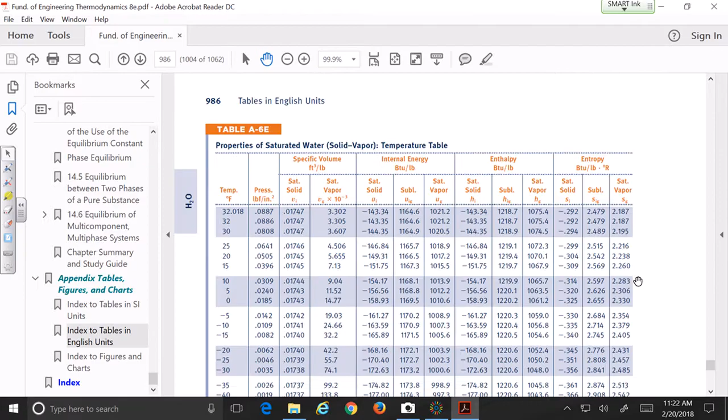And the same one for English units or SI units, okay? So in both units, so we say A18, 14. Okay, so this is A19E.

I don't think you need this one. You might need this one, so A20. That doesn't mean for this exam, okay? I'm just thinking about the rest of the semester. So A20.

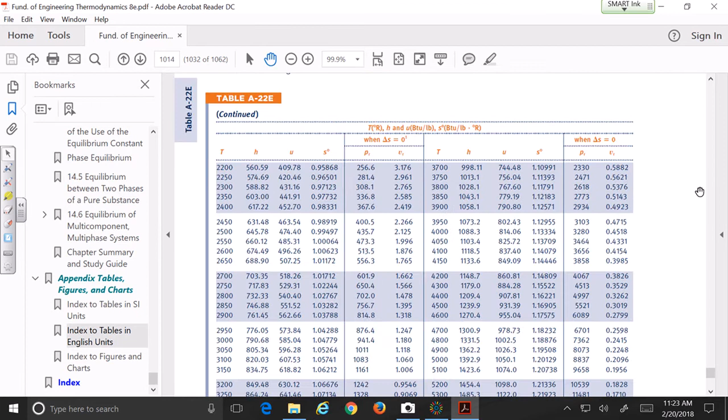This one, you're not gonna need it. A22. That one you might need it. What is this?

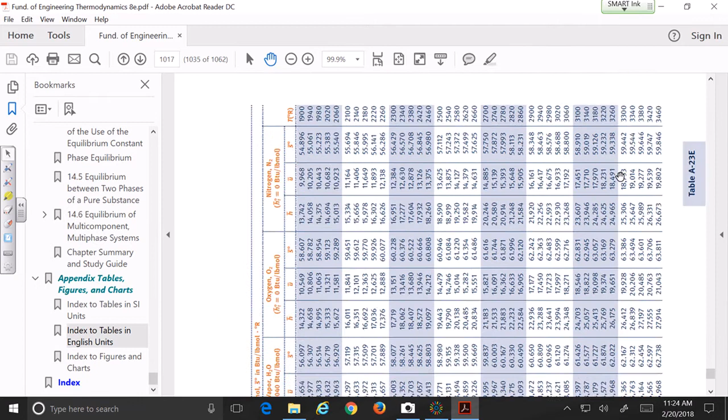I don't think you're gonna need this one, but it's just one extra. A23. You don't need this one. And you don't really need this one either, but again, you might need it for a problem.

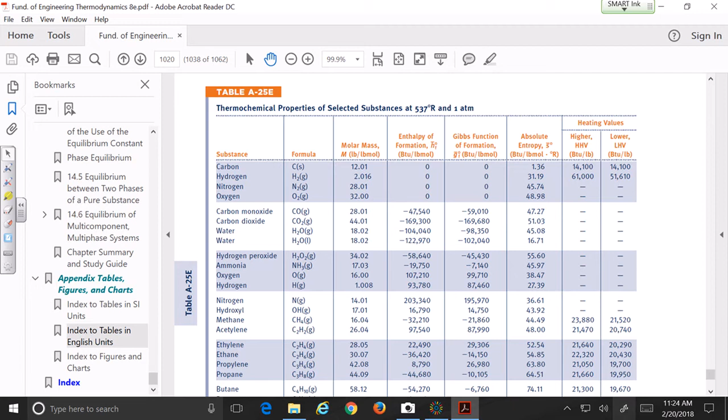You don't need this one for sure. Yeah, you don't need any one of those figures. You don't need them, okay? None of that stuff we're going to be using.

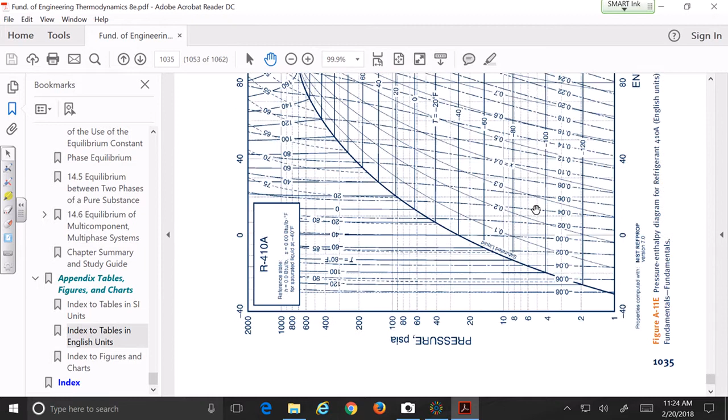Okay, so let's see. I will say both in SI and English units, I will say these tables. So from A1 to A18 plus A20, A22, A23 plus A25 for SI and English units. Okay, if you don't want to come with a very thick stack, if you print both sides of the pages, okay, you end up with not that many pages.

But it's up to you, okay? If you want to have all in one face so you don't have to go to the back, you are more than welcome.

Can we use the copies of pure substances sheets that are on Canvas too? You can use, you can also bring the page for the pure substances that shows you the two shape of the figures as well as the equation to find when it's a mixture. And I think you can use as well, but that one I will bring it all the time, the one for the units.

Okay? Yes? And just clarifying, apparently in my notes there's a few equations that we can add to that sheet, right? To that equation, probably you can add if you want at the back, because I think you will know them, but what is the general form of the equation for, let's say, conduction, convection, radiation, and I think you should also add what is the value of the constant for radiation, the Stefan-Boltzmann constant, okay? That one you can add it as well.

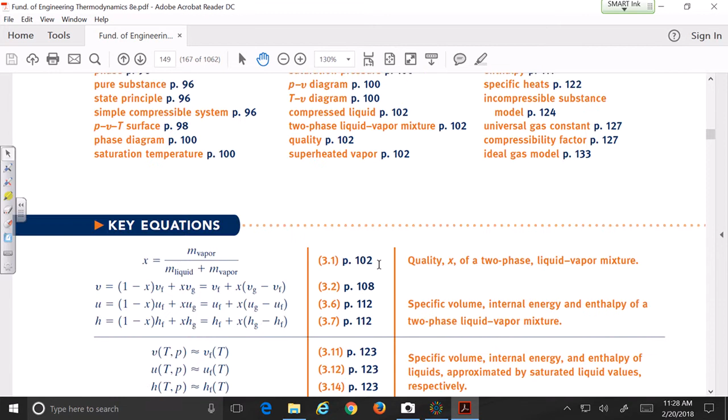So let's see what 333 is. Let's see what other equations are over here. Yeah, I don't see that. 333. Let's.

Should I give you 333? Looks like a long number. This one here? I don't think it's the right section. I'm on the wrong section. 3.33. Probably. Where am I here?

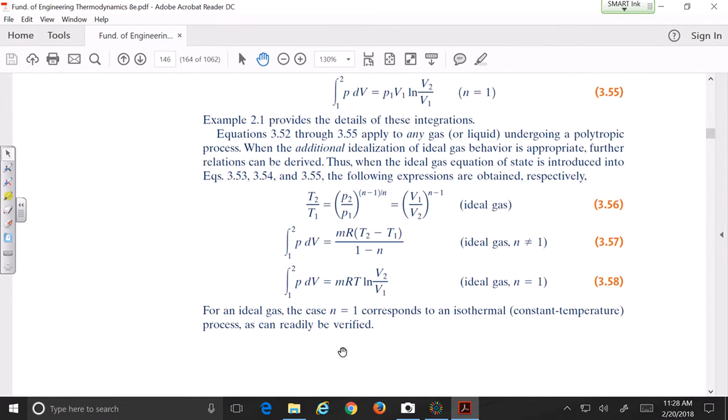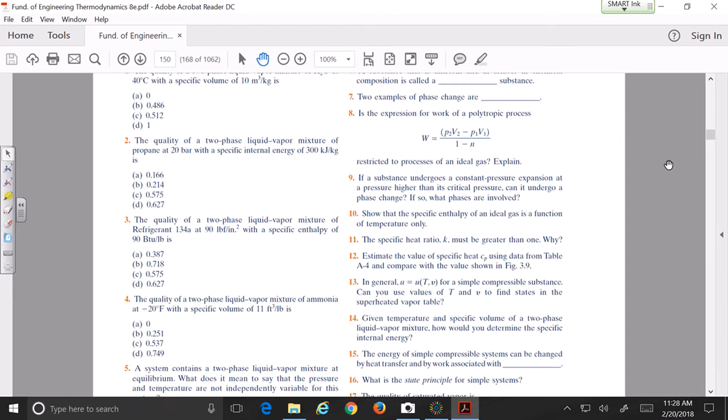What is chapter? Is this one? This is chapter 3. Keep going down, like further down. I mean, let me move this one so it's not that high. But I thought this is chapter 3 and 3.3 is this one, no? Right there, right there, right there. Down, down. Oh, okay. Those were questions.

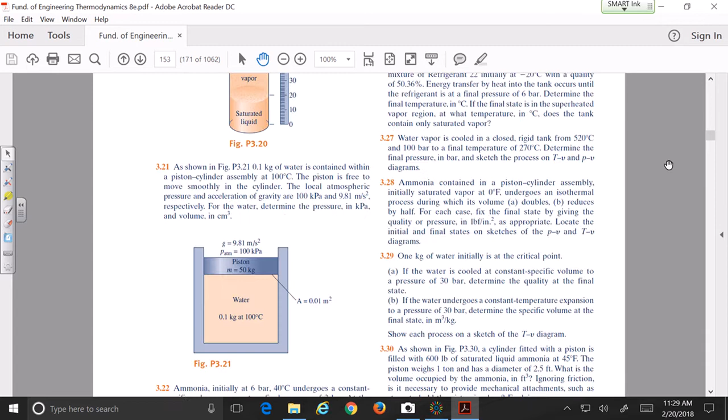I get it. So as you can see, it's not that I've seen the problems before, no? I have no idea what they are. Okay, so here we are. So let's see, problem 3.33. Let's do it. Let's see if we can do this.

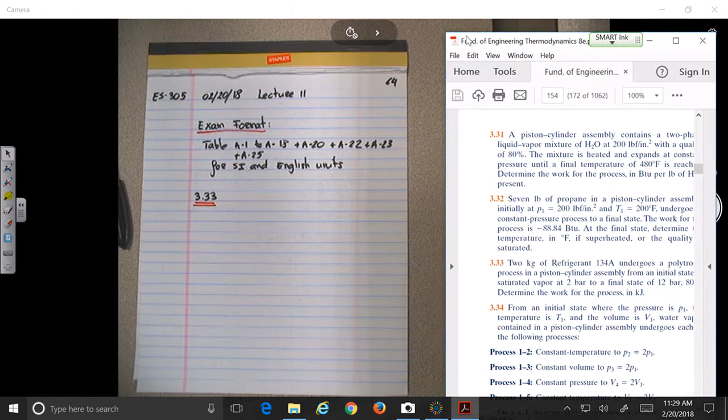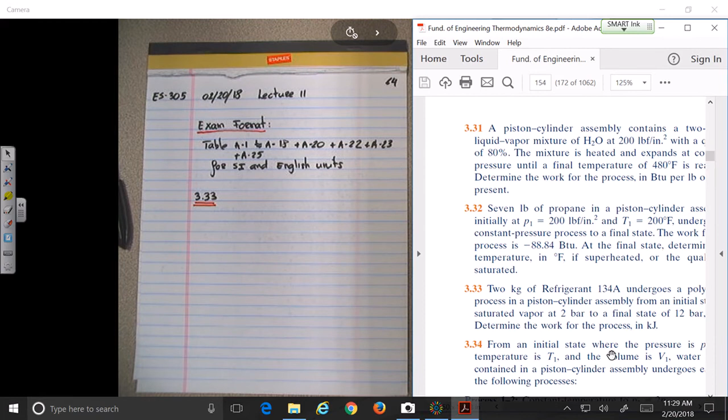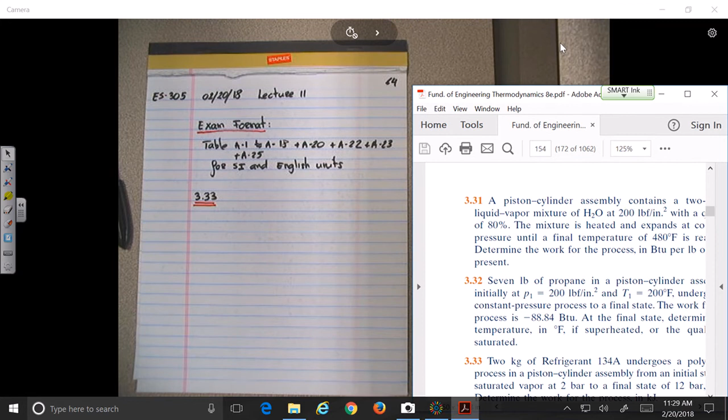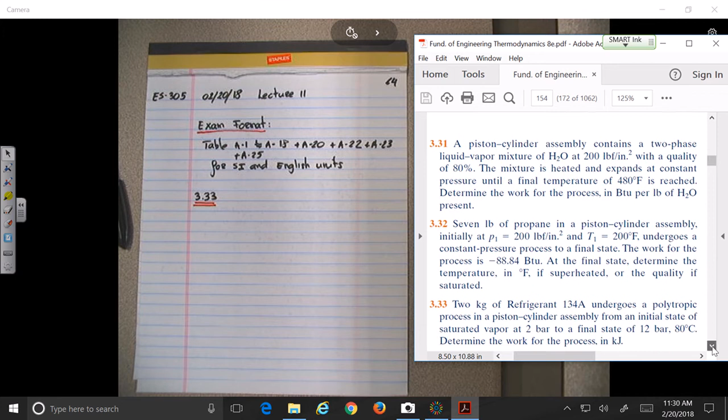Probably put on, I do the other way around. I move this to the right, and I write to the left, no? Can you read, or do I try to make it a little bit bigger? Is that a little bit better? But now I need to move it to the right. How can I do that? This is not really responding to good. Okay, so I think that's a little more clear.

So 3.33. Okay, so 2 kilograms of refrigerant 134A undergoes a polytropic process in a piston cylinder assembly. So as soon as you hear the term piston cylinder assembly, always do this type of figure. Okay, this is a bit automatic. I don't know if I need it, but I do this. So we know this is refrigerant 134A.

The mass is 2 kilograms. Undergoes a polytropic process. So what is polytropic process? Is PV, I guess PV to the gamma equal to a constant, okay?

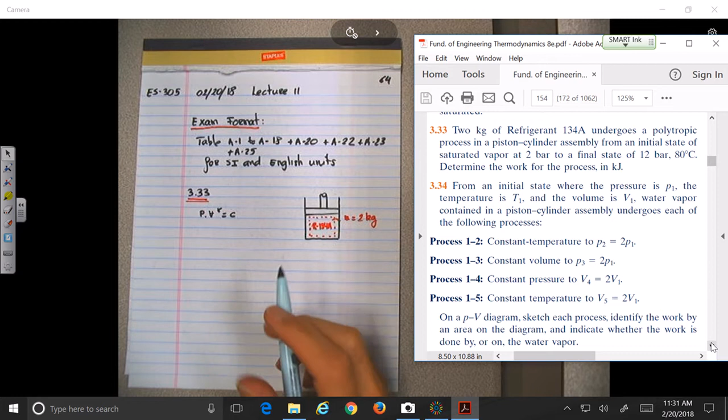Undergoes a polytropic process in a piston cylinder assembly from an initial state of saturated vapor. Okay, so we might not need this, okay, but you can do the figure or whatever you want. So let's say initially we are at saturated vapor over here. So P1 equals 2 bar. So maybe I did over here what diagram I'm doing here.

Okay, I do the T-v, so there should be lines of constant pressure. But then I go to a 1 to 2, so I don't know, maybe it's fine. All right, so we need saturated vapor. What else do we know? To a final state of 12 bars, so we know P2 equals 12 bars at T2 equal to 80 degrees Celsius.

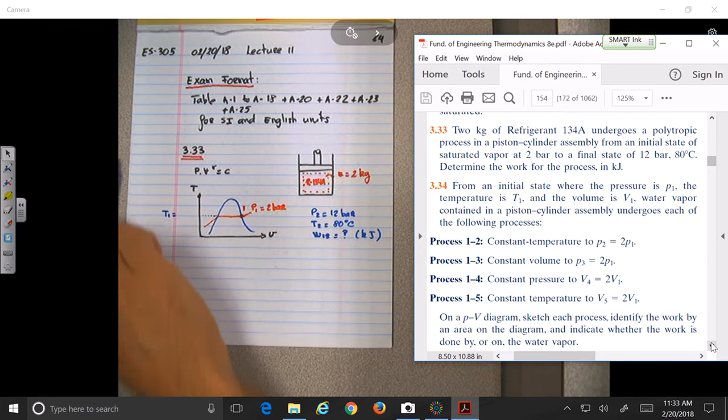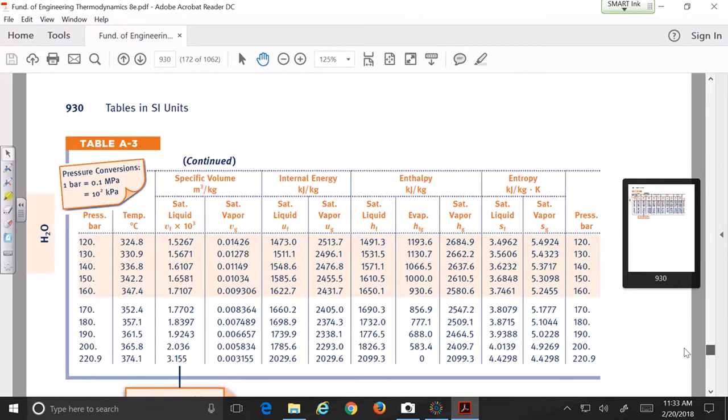I don't know if we need it or not, but just by curiosity. So I guess we could come over here. What is the table for that? A-10. Thank you. So page down.

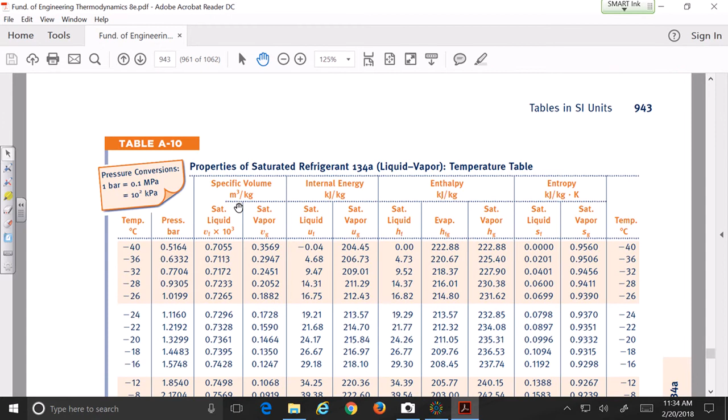A9, A10. So let's see, we know the pressure is 2 bars, so maybe table A11, do you have A11? So I will go to table A11. For 2 bars, what is the temperature? Minus 10.09.

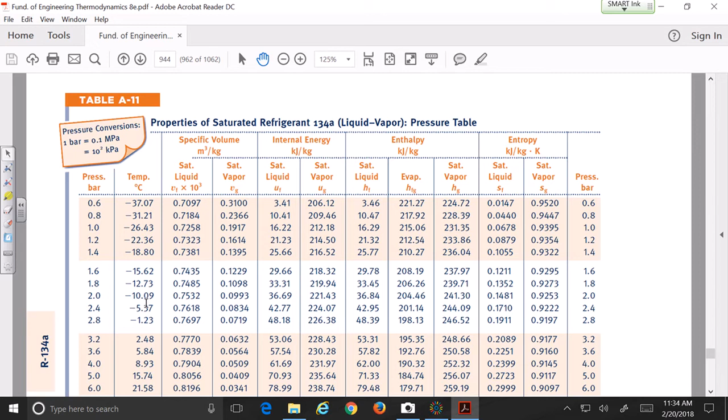So I'm just trying to see over here, and we know P2 is 12, so here P2 is 12. What is the saturation temperature for P2? 46.32. And the temperature in our problem is 80. So what's going to be the state? Superheated.

We can do that if you want. If you do it here, obviously it's not going to be to scale at all, but let's say this will be P2 equals 12 bars. We know the saturation temperature here, what is it? 46.32 - I mean don't put T2, but we know T2 is somewhere over here, where the saturation is 80. So really the process we are looking at is something like this. You should have done a figure bigger than that, okay, but again, it's...

So I'm here, and now I'm going to write this as being equal to minus 1 over 1 minus gamma. I'm changing the order, and now what I do is put the C inside. So it will be C, V2 to the power of minus gamma plus 1, minus C V1 to the power of minus gamma plus 1. Do you see what I've done between this step and this step?

Okay, nothing too complicated. So now we know that this is a polytropic process, so polytropic process means that PV to the gamma equals C. So for this one, I could say that C is equal to P2 V2 to the gamma, and for this one, equal to P1 V1 to the gamma.

So now we have the expression that Work 1,2 equals minus 1 over 1 minus gamma. And then what's going to happen to the V2 to the gamma times V2 to the minus gamma? They cancel each other - it's like having V2 divided by V2. They don't cancel each other, but it's equal to 1.

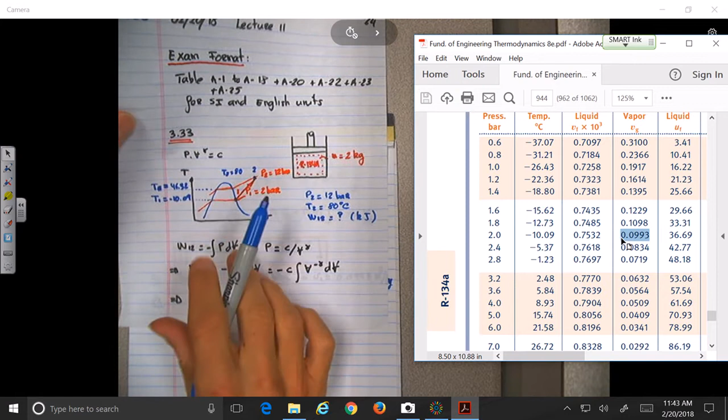Now V2. From the figure we know that V2 is going to be superheated, so I'm guessing it's one more table. Table A12, is it table A12? So we go to the superheated table. You see here they tell you to divide the value, so this is new, that's good.

So superheated refrigerant, what do we know over here? We know the pressures and the temperatures. So let's see if we find pressure of 12.

Okay, maybe it's on this one. I'm guessing 8, 10, right hand side, that's what I thought. 12 over here. We need to look at what? At the temperature, so it's going to be difficult for me to look at this all at once. So it's 80, is this line, no?

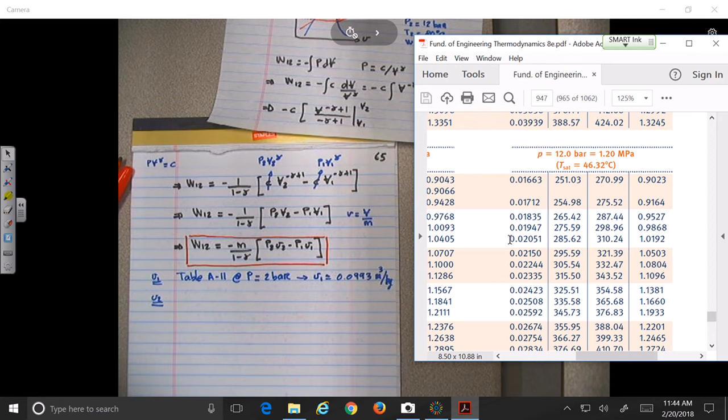Yeah, so the one right above the orange on the first one. So it looks like it's going to be this one here, no? And this one here, we're going to look, I guess, at this value here. Let's check, going up. This is the V. So what should be the V?

So we go, let's say, to table A12, at P equals 12 bars and T equal 80 degrees Celsius. We have that V2 is equal to 0.02051 cubic meters per kilogram.

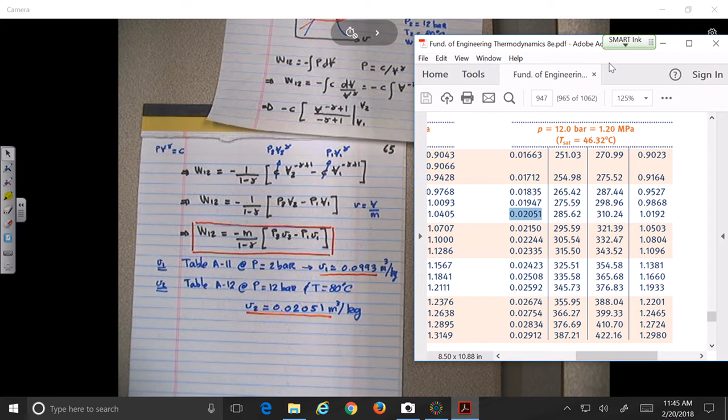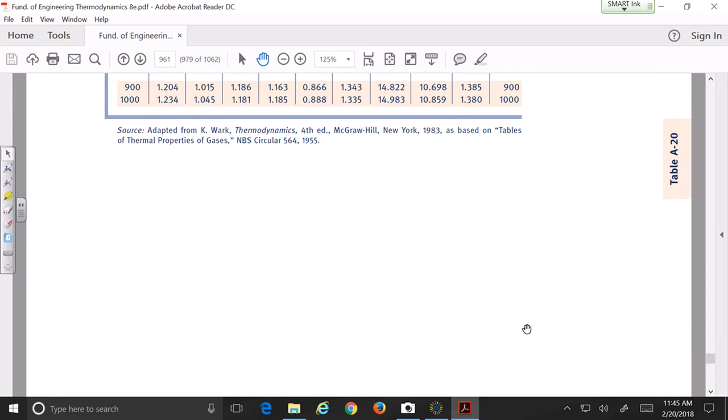Okay, so now for the gamma, let me magnify this. My first reflex will have been maybe to go to some of these tables here, but they probably don't have it. Do they have this one for the gamma? You see, they are for air, nitrogen, oxygen, but they don't have it for refrigerant, okay? So my first reaction would have been to come to this figure here and see if they had it. You see the CP, CV, K. The K is what we have, okay.

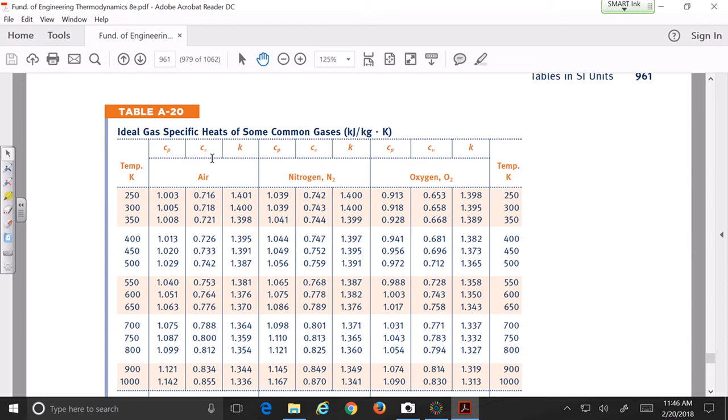So let's see. Okay, so let me look at the solution and see the way they do it, that way we don't turn around. So it's 333.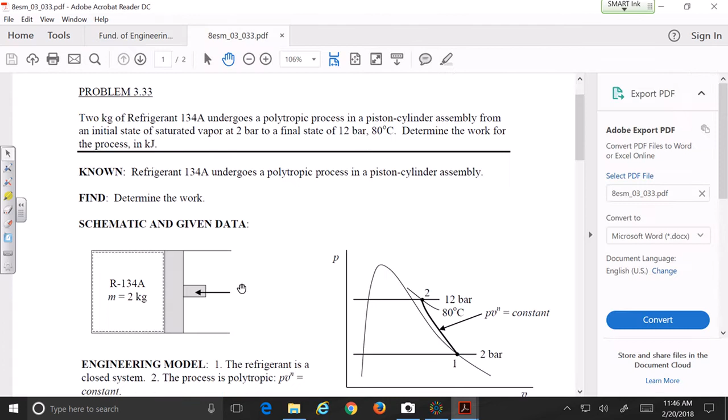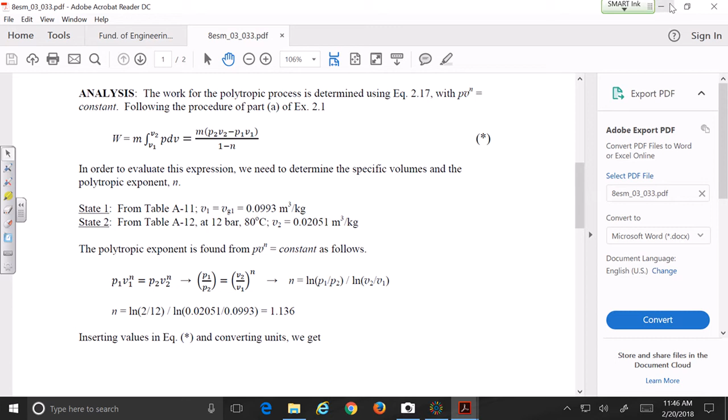Okay, so let's see. Okay no, yeah, it's very simple. I should have thought about that. It's not complicated, so basically what they do is this.

So basically, you know it's a polytropic process. So polytropic process means that, now we're trying to find gamma. Polytropic process means what? P1, V1 to the gamma will be equal to P2, V2 to the gamma. Okay? So over here,

Okay, so this will give us what? Let's say this will be equal to P1 over P2 will be equal to V2 over V1 to the gamma, no? Okay?

So now what I'm guessing what they do is that they take the log on both sides. Yeah, so this will give you what? All right, and now my guess is that they use a property that log of V2 over V1 to the gamma is actually equal to what? Gamma log, correct. So you use the property that log of A over B to the C equals C log of A over B, no? Okay, so use that property.

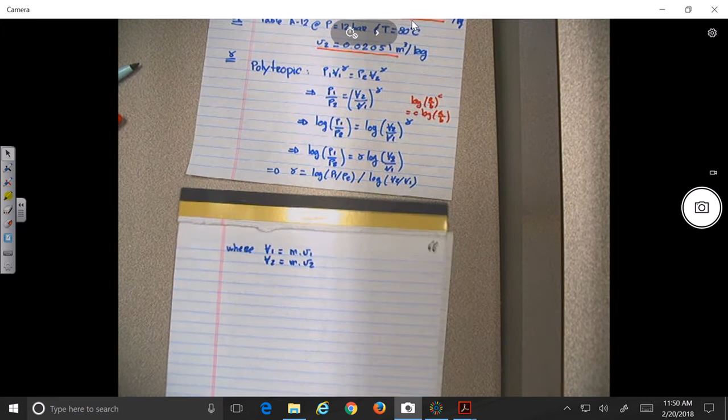Okay, so now in this problem, what is V1 and V2? Yeah? Okay, so I guess now you can just go and substitute, no? And then you come back to this equation over here on top, the one for work 1,2, and you substitute. Yep, okay, so I'll let you do the numerical application.

But you see, there is no magic equation, no? Okay?

When we start doing the numerical calculations, do we need to convert everything into kilopascals? For this problem? Oh, that's a good question. So once you start doing the calculations, yes. Once you come here, you need to transform the bars into kilopascals to get the answers in kilojoules. Remember, if you write down the units, that would be the best way to check your answer. Yes, because if you use bars over here, it's not going to be the same, no? You need to transform the bars into kilopascals first.

Is that the same thing for finding gamma? You can put them into pascal? Yes, same thing for gamma.

I mean, gamma will work because you get the same ratio, no? It will be twice. You don't have to, but to be safer, I will always transform everything, okay? If you want me to give a general rule. But in this case, no, because the ratio will be the same.

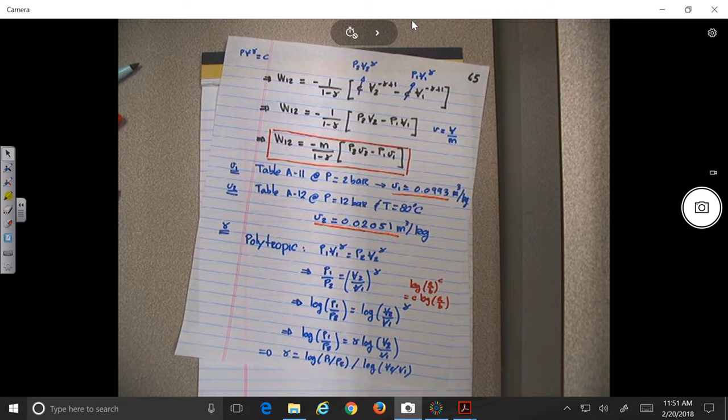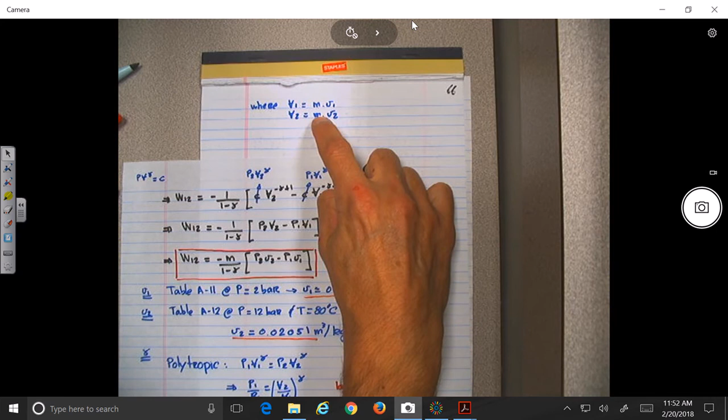But what about V2 and V1? No, V2, V1, you can also leave them as they are. The ratio should be the same. So for example, here for V2, V1, I don't think you need to use this. You can use the ratio V2 over V1, no? You see the specific volume V2 over V1 because anyway the mass will cancel, no? Yeah? So the ratio will be the same.

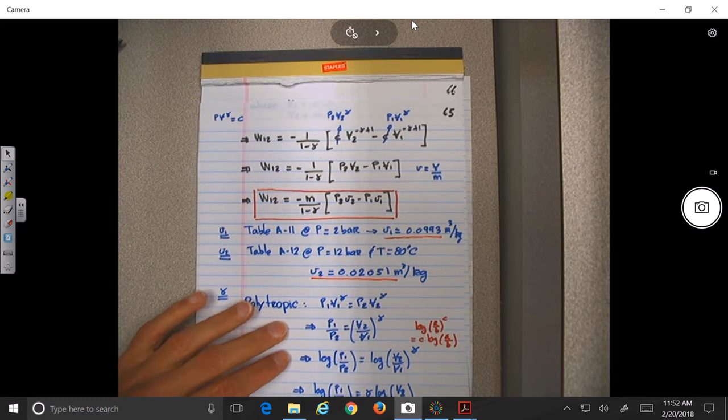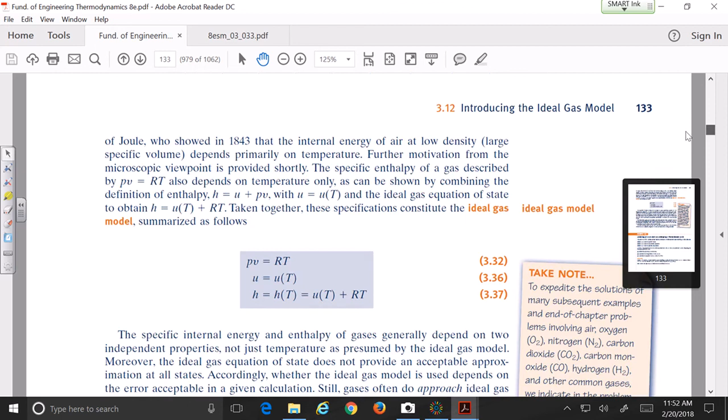Okay, so more questions about the homework? Yes? 356 part A. There is no part A or B unless it's something very clear. So 356, let's see what 356 is. All right, here's the problem. 3... 56.

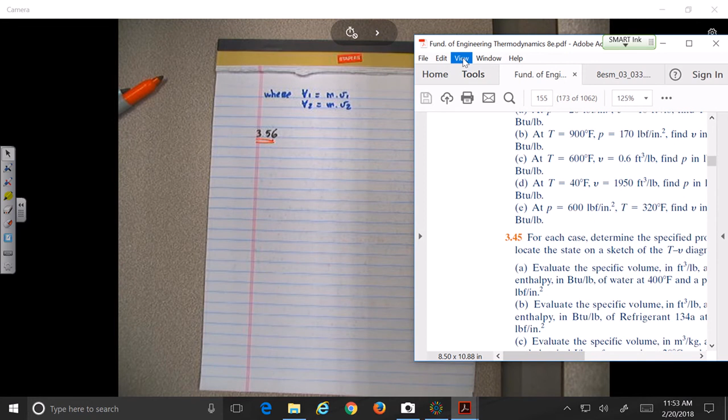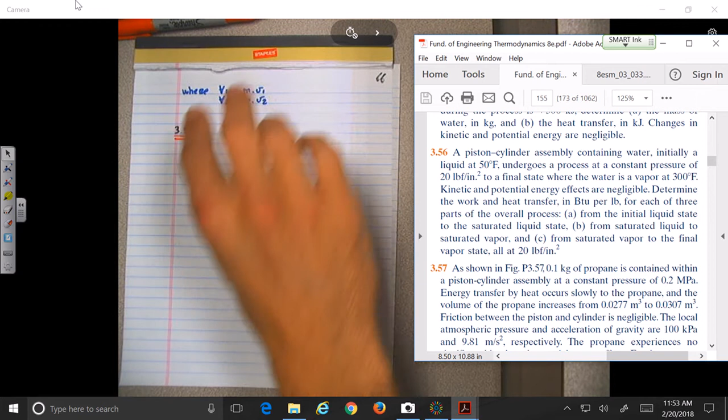Okay, let's see if I can move this to the right over here. All right, I tried to write over here. So let's see, 356. Again, a piston cylinder assembly. I mean, it's pretty monotonous, no? Always the same figures. Piston cylinder assembly containing water. Let me just say H2O, okay?

Containing water, initially liquid at 50 degrees. So let me just say initially, state 1, liquid at 50 degrees Fahrenheit, undergoes a process at constant pressure. Okay, we know that because whatever happened with piston generally is constant pressure, no? At constant pressure of P constant equal to 20.

lbf per inch squared, to a final state where the water is vapor. So state 2, I should have done the figure, but vapor at T2 equal to 300 degrees Fahrenheit. Kinetic and potential energy can be neglected.

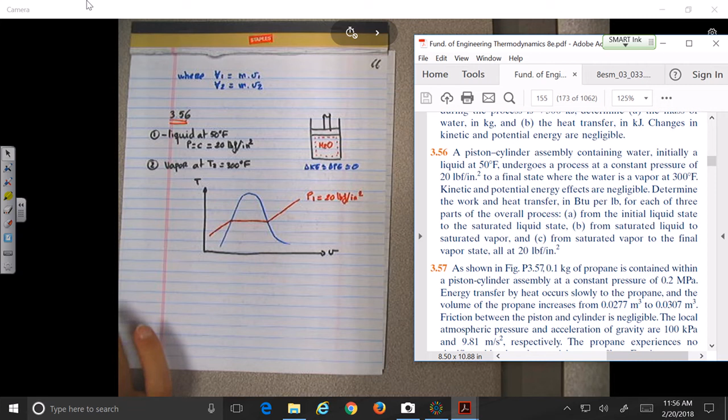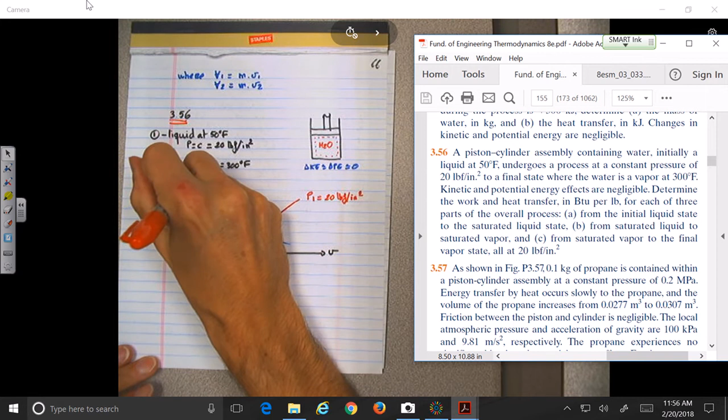Let me not guess. I cannot kind of guess what's going to happen, but let's say T2. Wait, I don't want to guess, okay? Because I think I know what's going to happen, but okay. So we are in water. We know P1 equals 20, no? So to what table we need to go? Maybe you can help me here. Should be A2E, something like that, or A3E.

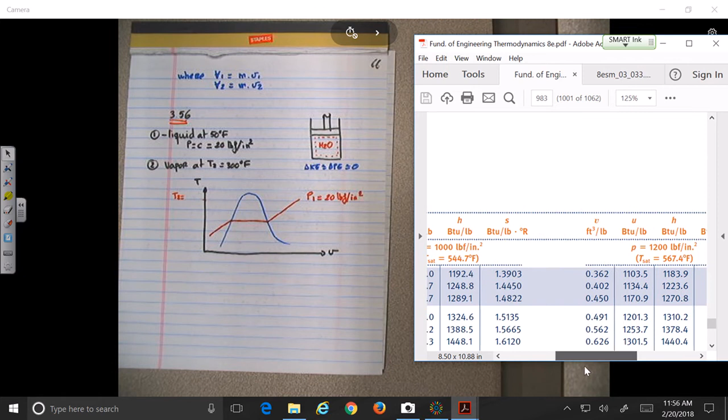So let me do this a little bit bigger, okay? Down, what is going down? I want to go... oh, I want to go up. So I guess it's going to be A3E, the one I want to look at. Which one is this one? This is the one for the pressure. So table A3E at what? At 20, no?

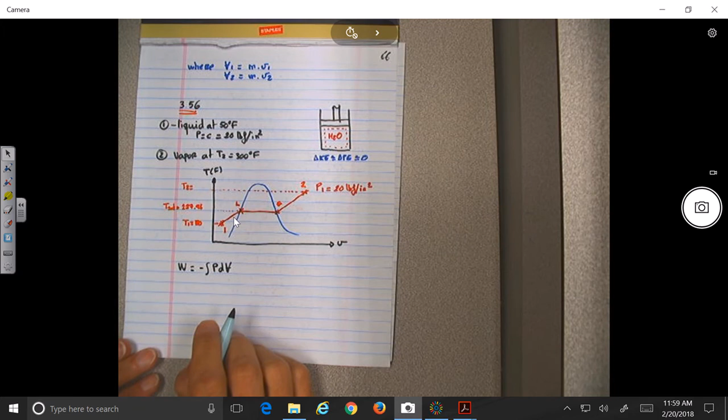Okay, so let's see, so what do we need to solve in this problem for? Oh, the work and the heat transfer. Okay, so let's do first the work. So for the work, again, the general equation for the work is minus P dV, no? So in this case, what we do, P is constant. So the work will be equal to what? Minus P times V final minus V initial.

Okay, or using the specific volume, we're going to have the general expression for the work is going to be equal to minus M P, V final minus V initial.

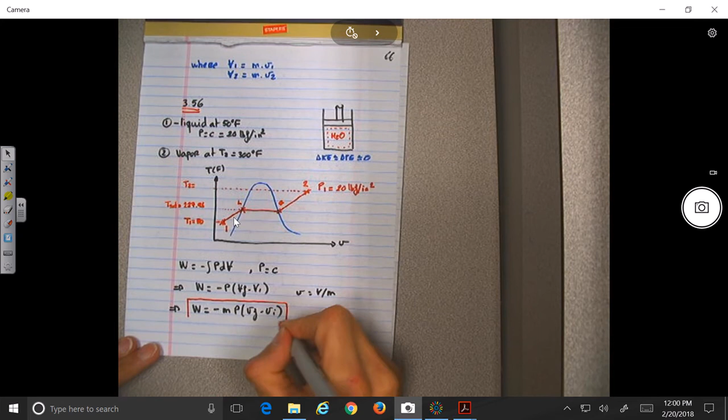Oh, the one is BTU per pound, so what do they give you then? No, they don't give you the mass over here. So I had the impression they give you the mass, but forget about it, it's completely the other way around. So you go from here using this, we have this, okay, you move it to the other side. I don't know why I had the impression we had the mass, I was still thinking about those two.

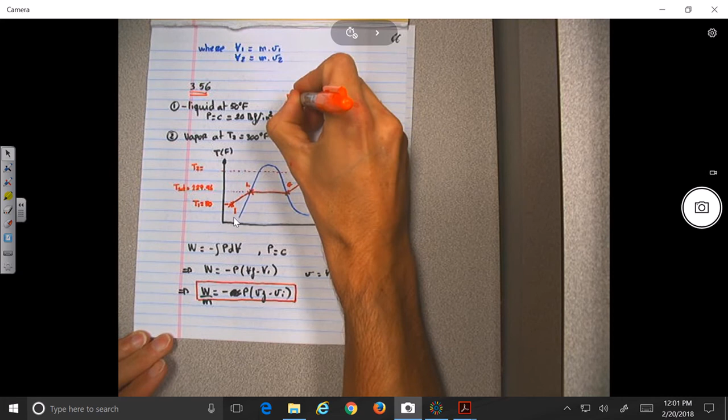You see, that's because I did not write over here what we needed to do. So we need to find work over M and Q over M. Is that what we need to find, for each one of the three processes? You see, if I don't write it down, then I do the mistake. That's why I say this part is very important.

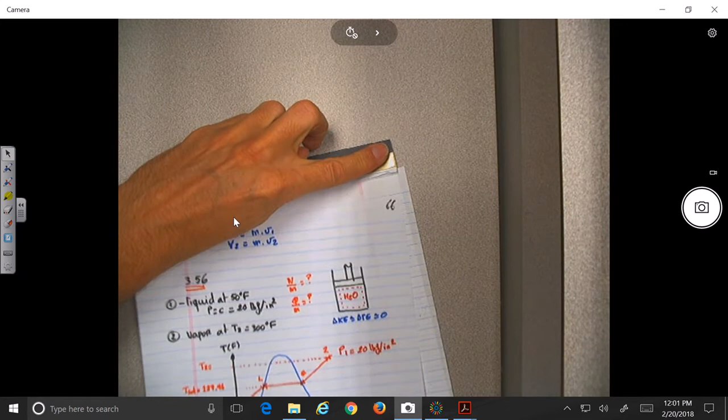Okay, the setup of the problem. All right, so let's do the first one, let's go from point 1 to point L, okay? So from 1 to L. Ah, I see why you asked me this problem, yeah, this can be tricky here. Let's see what can be the problem.

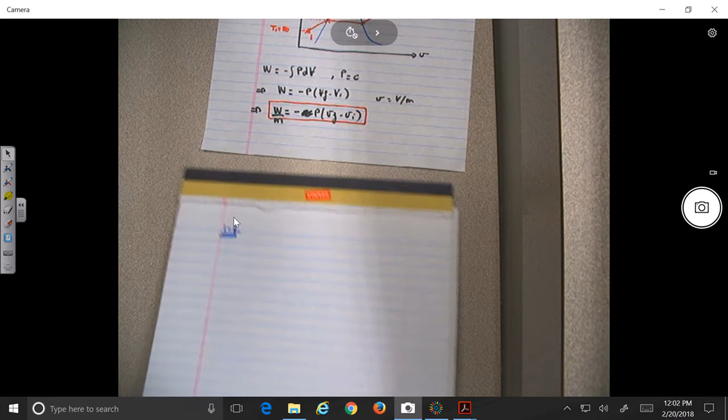All right, so over here, we know that the expression for the work is going to be what? Work 1L over M is going to be equal to minus P times VL minus V1. Okay? So in order to find VL, that's the easy one. And let's say V1.

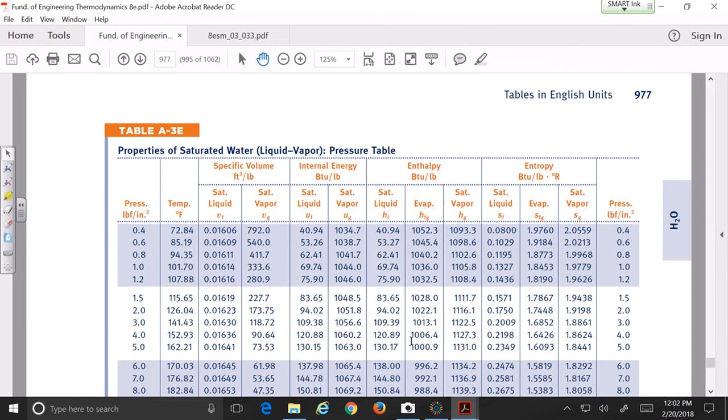So let's see, how did you find V1 and VL? You can find VL, how did you find VL? So you went to the table A2, no? No, A3, is that what you did? I know I'm asking, so A3, but this is at 227. Okay, so 227, so VL will be the V fluid over here, no? Yeah? At what pressure? 20. So we are over here, is that correct?

So we go to table, what is this table? A3 or A3E. At P equals 20, you find that VL equal to 0.01683. Okay?

So basically what we did is that on this figure over here, we found VL. Now we need to find V1. So, all right, there is nothing perfect, okay? But generally what people do in order to find V1, because once you go to the tables, they don't give you tables for compressed liquid, no? You have tables for superheated, where they give you the pressure in function of the temperature, okay? But they don't give you the equivalent for the liquid, okay?

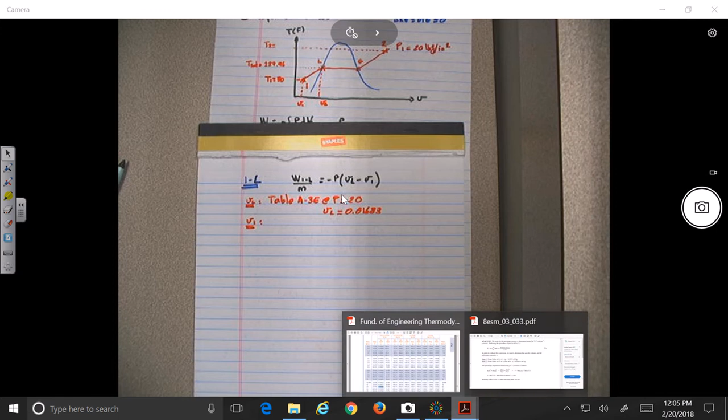So the way to do that, and there's a reason why they do it, is because the properties, once they stay in the liquid state, they are basically constant. So what you need to do on this one is, what is the other thing that you know about state 1? You know the pressure, and what else you know? The temperature. So now you can go to table A2E at 50 degrees Fahrenheit. Okay? And this time you will look at the V fluid at 50 degrees Fahrenheit, which is 0.01602.

Okay, it's an approximation, it's nothing perfect, okay? But what do you think is the approximation they are doing? No, because what is the pressure over here? It's 0.17, it's not 20. That's the inverse of density. What is the inverse of density? 0.01602. The density of water, okay, so that's good.

So basically, yeah, very good point, okay? What I was going to say is, do you remember what we say, that once a substance stays in one state, the properties do not change a lot, no? If you look over here, do they change a lot, the properties? Okay, so specific volume, like he mentioned, is the inverse of the density, no? So do you think the density of the water is going to change a lot when it is in liquid state? Okay, so basically the assumption they are doing is that the properties do not change a lot once you know the state in which they are.

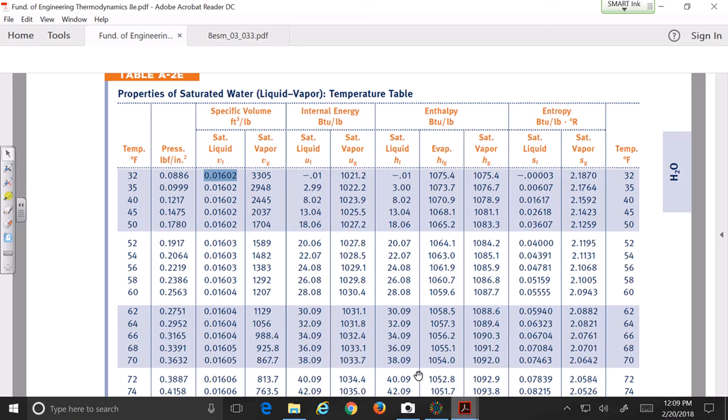So let's see, let's go to table A3E, or yeah, A2E. So A3E at 20, we need to look for what? For the VG, no? Which is 20.09.

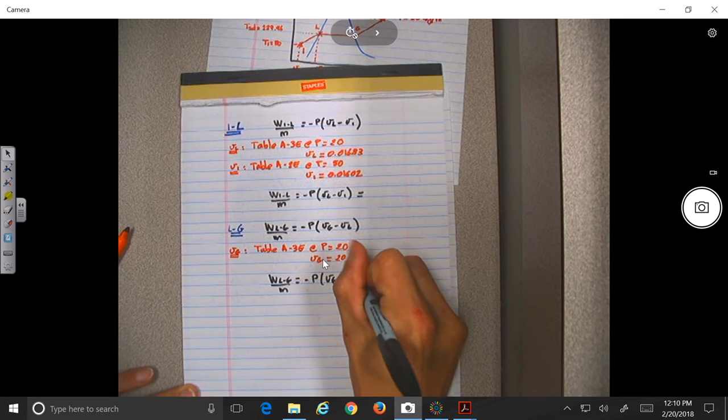Okay, from this one you can calculate the work LG over M equal to minus P times VG minus VL.

And finally, what do we need to do between G and 2, okay? Even though you might not see it, I always have the figure over here, okay? V2.

So now we need to go to what type of tables? So let me write down work G2 over M equal to minus P times V2 minus VG. We need to find V2.

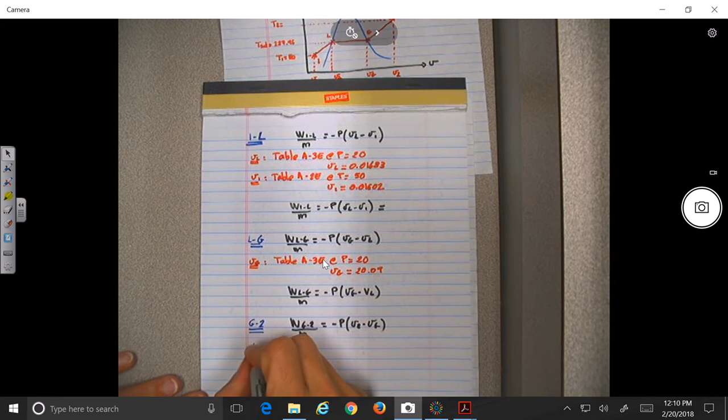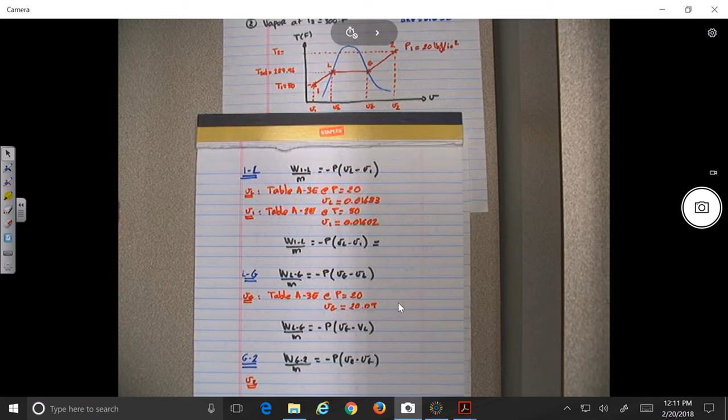What is the state of 2? Superheated, no? So we go to the superheated tables at 20 and what is T2? 300? Yeah. See, I added over here 300. So superheated tables

at 20. Oops, I think I skipped it. They have the 300. So the V, I'm guessing, is the first column. Yeah, so the second column after the temperature. So what do you get for V? 22.36.

So table A4E at P equals 20 and T equals 300. That gives you V2 equals to 22.36.

Okay, I'm just thinking that now for the Q's we need to do the same thing for the U's all over again. Yes, you can do the rest of the U, but for U1 you do the same thing. You take the U1 for a saturated liquid for the temperature of 50.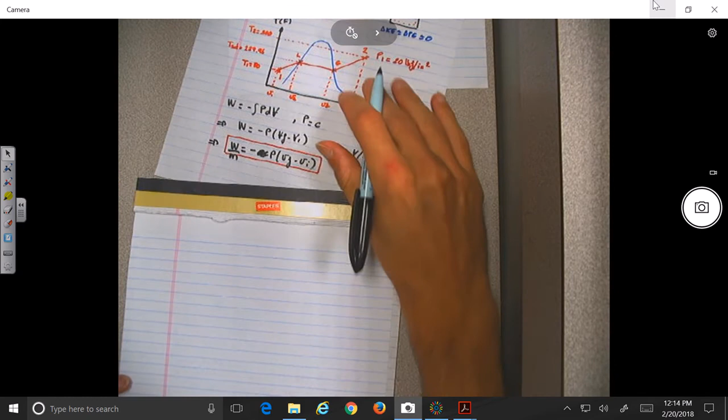So 68 for, sorry, not for internal energy, for Q. Okay, what's happening is that we do the first principle of thermodynamics.

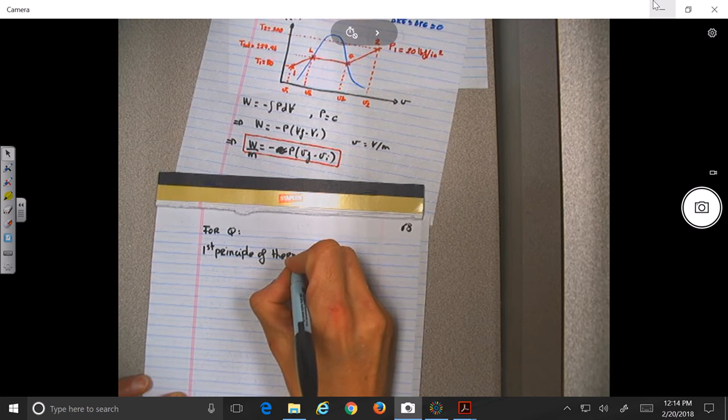Which means what? Q plus work equal to change in internal energy. Okay? Or which means Q over M plus work over M equal to, instead of the capital U it's the lowercase u. So you get Q over M equal to, let's say, U final minus U initial minus work over M.

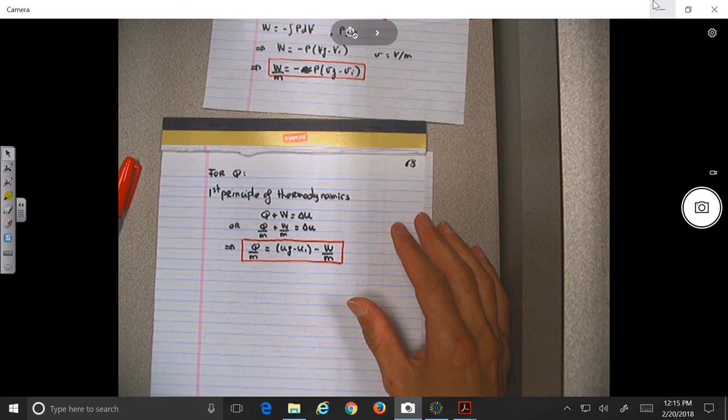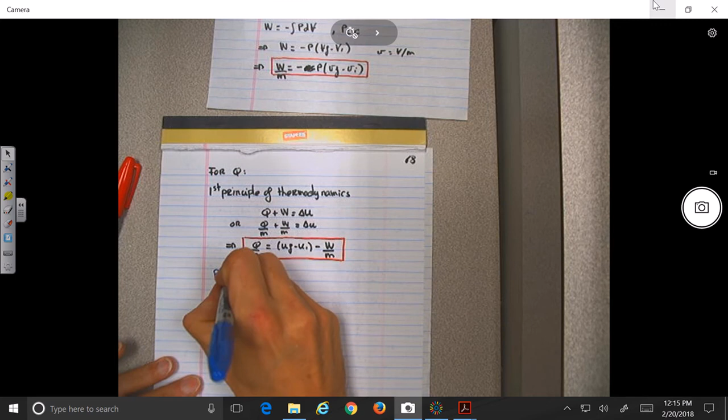Okay, so let's see if we can make a table. I don't know if this is going to be good or bad, but let's try it. So points, let's say it will be 1, L, G, and 2.

Table, what we need to look at. And here we put U, okay? Let's see, that will make it a bit faster. So maybe let's start by the end. So we don't have any question because I think the problems are going to be once we get to 1, no? Okay, so let's see, by the time we get to 1, we can think about something.

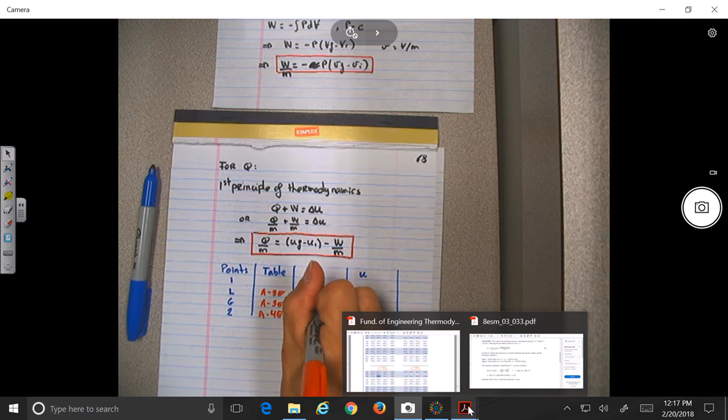Okay? For G, we can probably go to table A4E, but let's say we do it from table A3E, and let's do at the same time L and G, no? Table A3E at P equal 20.

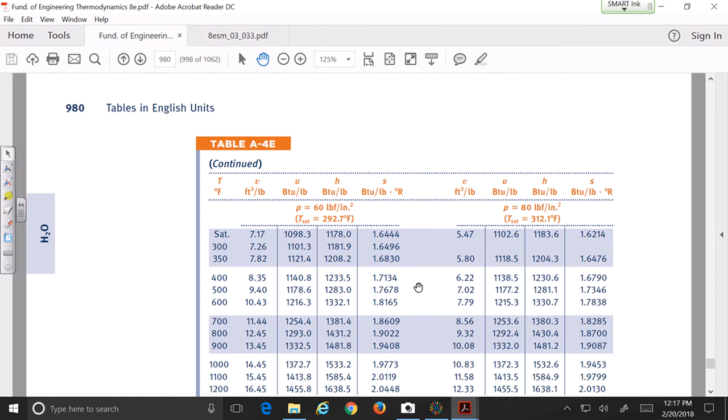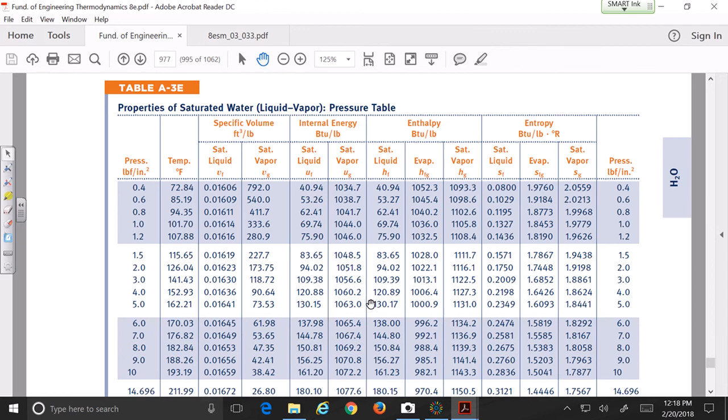Why is it going down? Up. So A3E at 20. Let's see if I can make it from here. At 20, we know V fluid and V gas, no? So that means that V gas is equal to 20.09.

Oops, no, that was the other one, sorry. 196.19. Was looking at the V. So it's 196.19, this two over here. Okay, I did the wrong one. All right, okay, so anyway, U liquid is 196.19, and the U gas is 1082.0.

Okay, UF and UG, no? So I put over here, sorry for that, it's 1082.0 over here. It's not going to be clear, so let me write over here, 1082.

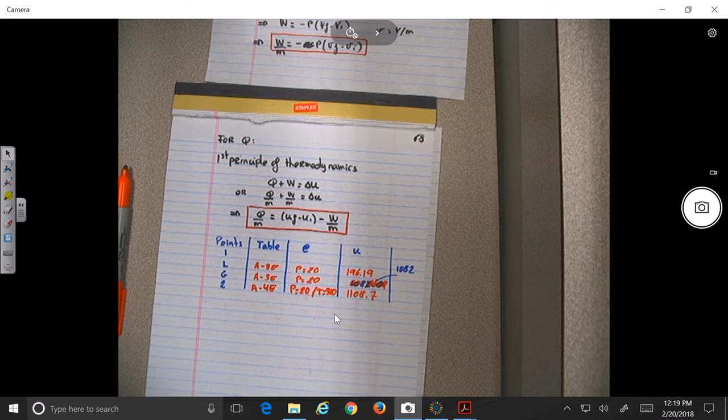So for the values for V earlier, if we knew that we were going to find V for all these different steps, you could have done this little table first. Yeah, it would have been a lot smarter to do the table and put the values for U and V. But I'm not that smart, okay? If you knew, you would know that, but I was just trying to be methodical. But being methodical and going through the procedure is not always the most optimal way to solve the problem.

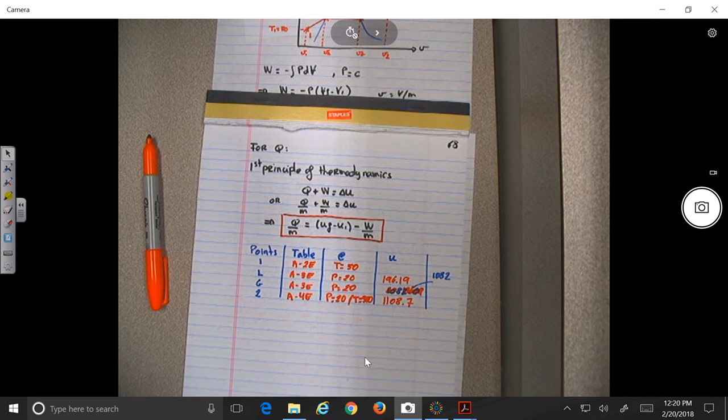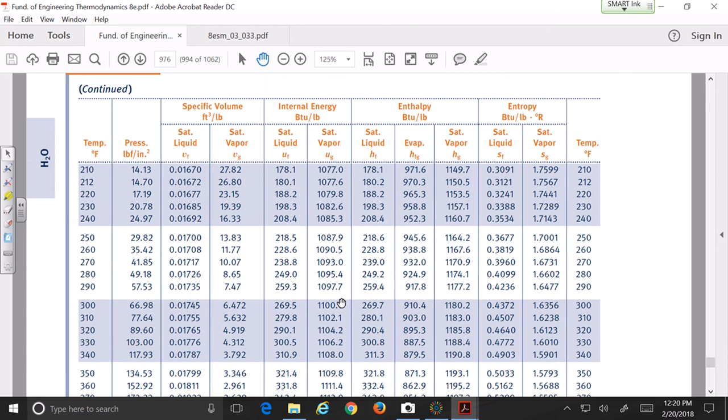So now, for one, I think the only option we have is to go to table A-2E at T equal 50, and let's see if that's a good assumption or bad assumption. So table A-2E, is it 20 or 50? 50. I mean, what can I say? It's not a great assumption.

Use Q equals MC delta T. Q is the mass times C of water, and delta T is the temperature difference. We don't know the mass, but we're finding Q over M. C is the specific heat of water, it's on the unit sheet. Delta T would be 227.96 minus the 50. That would give us Q over M, which we're trying to find.

Yeah, but where did you find the C from? From one of the tables? No, this is water. C is the specific heat of water. But you're making an assumption there, that the C of water is constant. If you want to be accurate, it will also change with temperature, because what is the definition of C? It's partial of U with respect to T at constant volume. So you end up with the same problem, because really you will have to find a table that gives you the value of C for different temperatures. So here's why maybe this is not a good assumption, because this is not that constant.

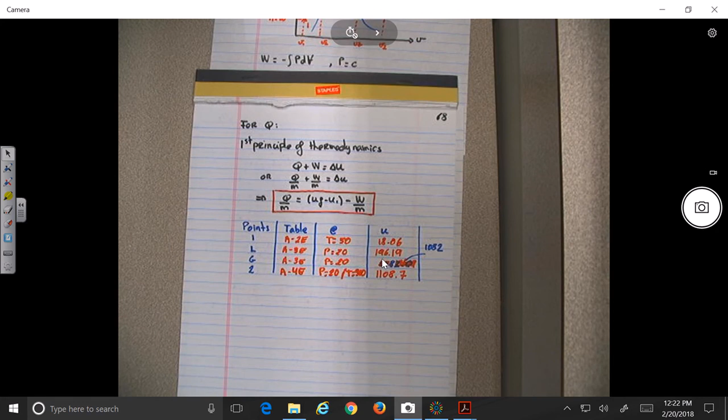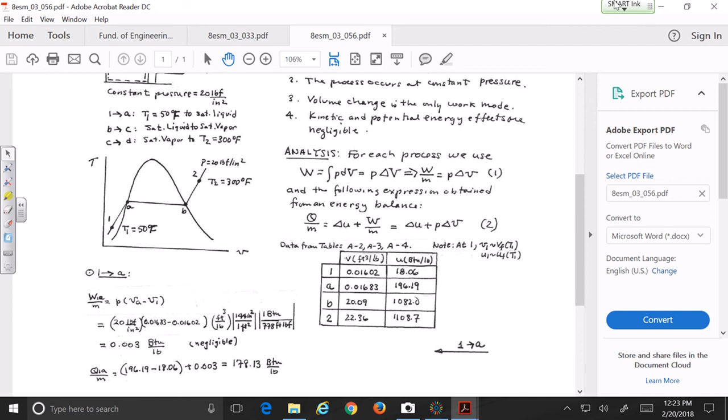What did they do for this one on the solution manual? Do you know? What was this problem? 3.56. So they are smarter than me, they do the table. But basically they do the same thing for the internal energy. What's important is not that you look and say okay I got it right, but that you realize that's the way we solve the problem, and you need to be aware that this is not such a good assumption, because properties of internal energy do not remain that constant as a function of temperature.

The V's remain pretty constant, as you can see on this column, but the U's do not remain that constant. So the proper way to do this would require a table that gives the properties of subcooled liquid of water. But it's not the case here.

So it's almost 12:30, so I think that's about it for the problems. For the exam, sometimes I used to give a lot of problems from the homework, but now less, because some people were kind of cheating, bringing solutions. It can still happen, but it might not. I always try to find something similar to what we've seen together. First problem, something about the first law, power cycle, refrigeration cycle, or heat pump cycle. Second problem, something about heat transfer: conduction, convection, or radiation. Third problem, something about the problems we did today, using the tables. Any question about the exam?